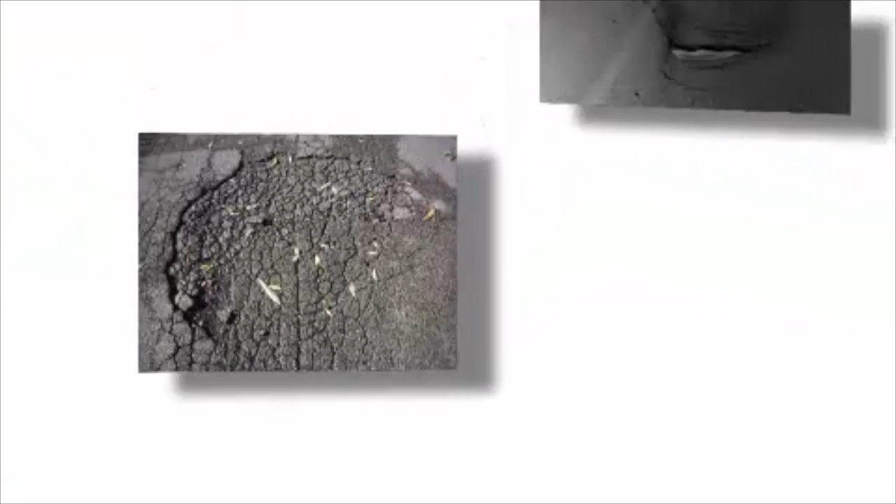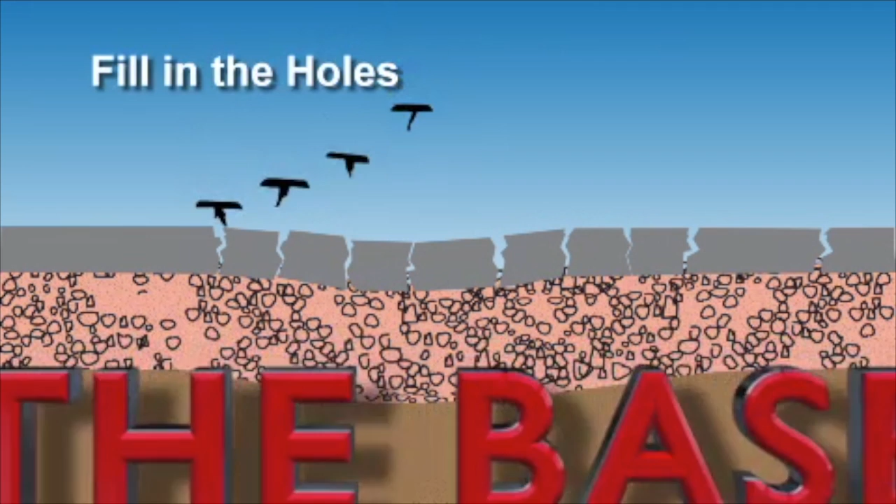When you take a closer look at the most common road problems, such as potholes, cracking, rutting, and shoving, it's generally not the asphalt itself that is to blame. It's the base. However, most common repair methods merely fill in the holes, seal the cracks, or cover it up with an additional layer of asphalt called an overlay.

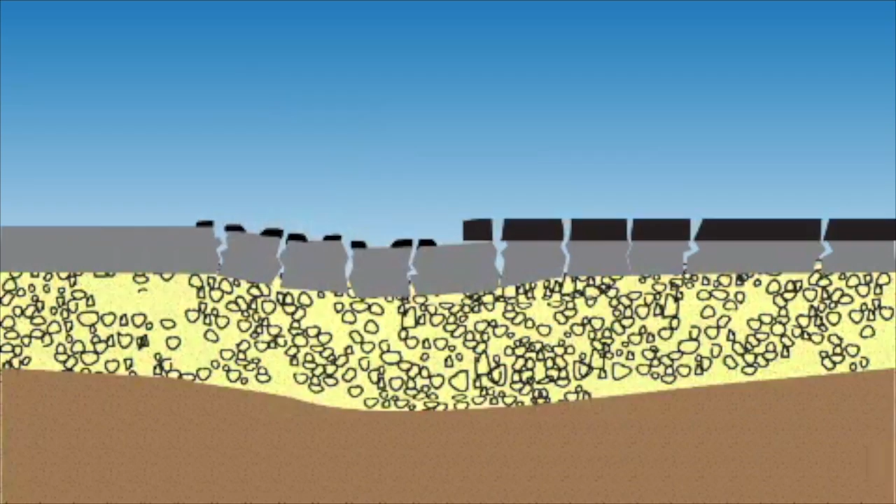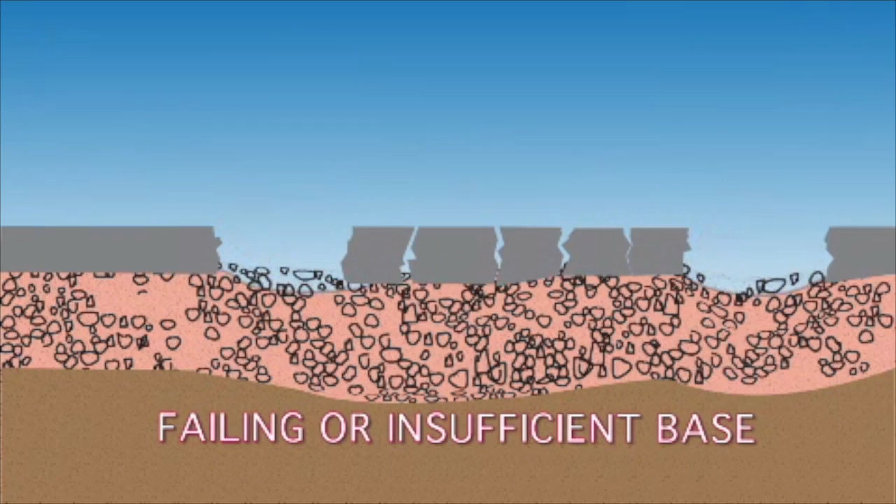Over time, this accumulation eventually needs to be milled down to make room for yet another overlay. All the while, the real problem of failing or insufficient base is never addressed. So it's just a matter of time, and the holes, cracks, rutting, and shoving reappear in a seemingly never-ending cycle.

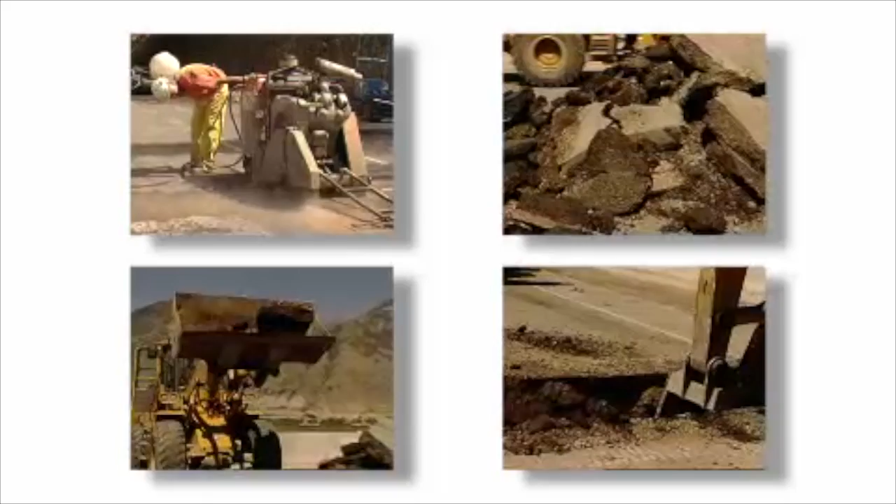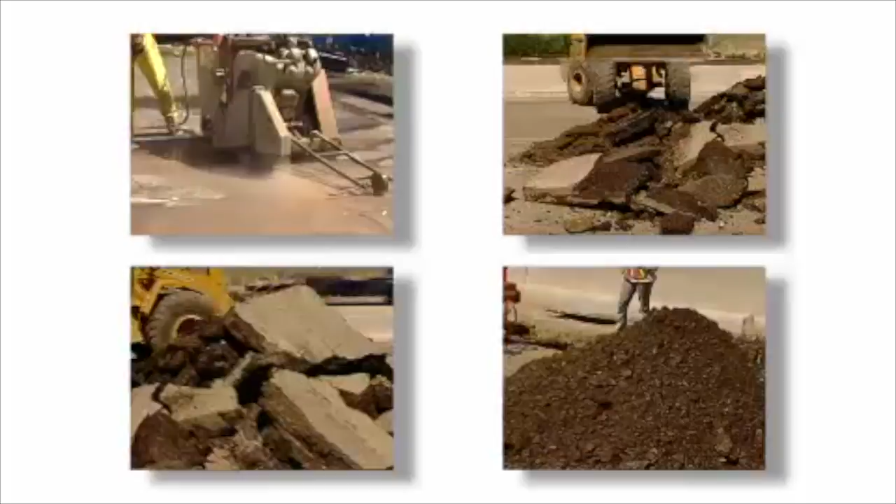Eventually, the road may need to be rehabilitated, requiring all of the asphalt and underlying material to be removed, hauled away, and new material to be hauled in, both of which are very costly and time-consuming.

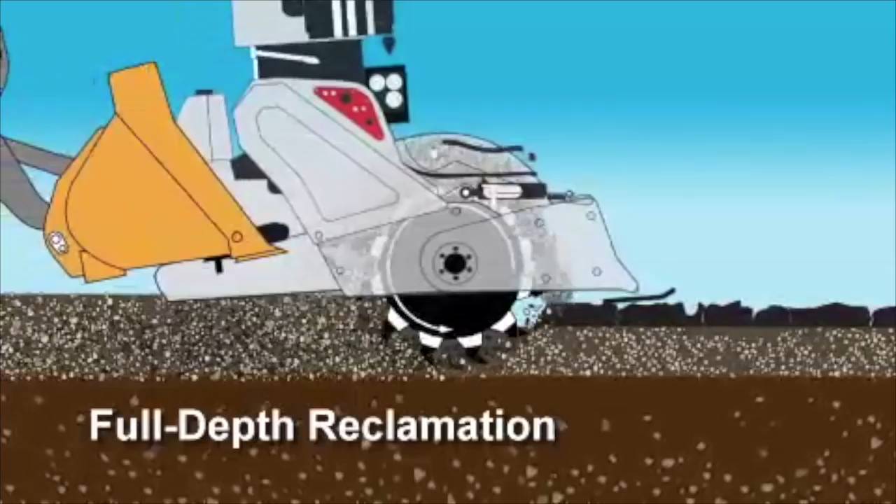Full-depth reclamation, which has been around since the 60s, is simply the process of pulverizing an asphalt surface, along with all of its holes, cracks, and ruts, into a reusable material that is uniformly blended and incorporated into the insufficient or failing base, adding both volume and structure.

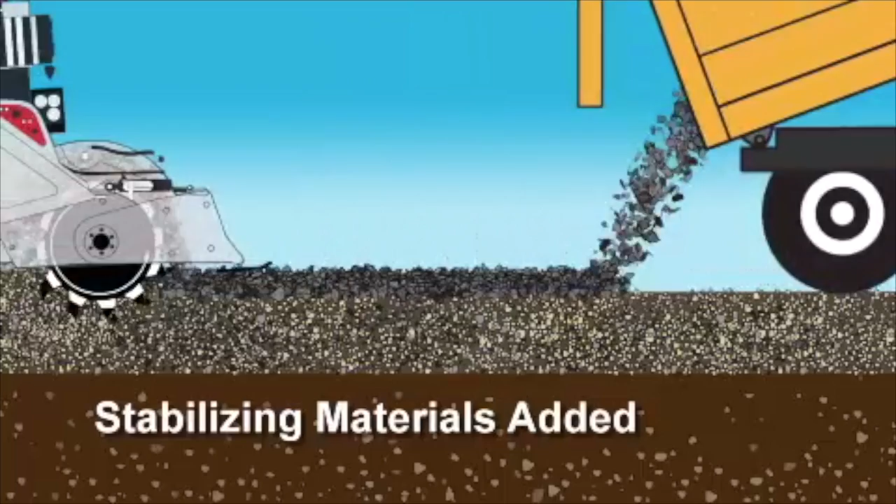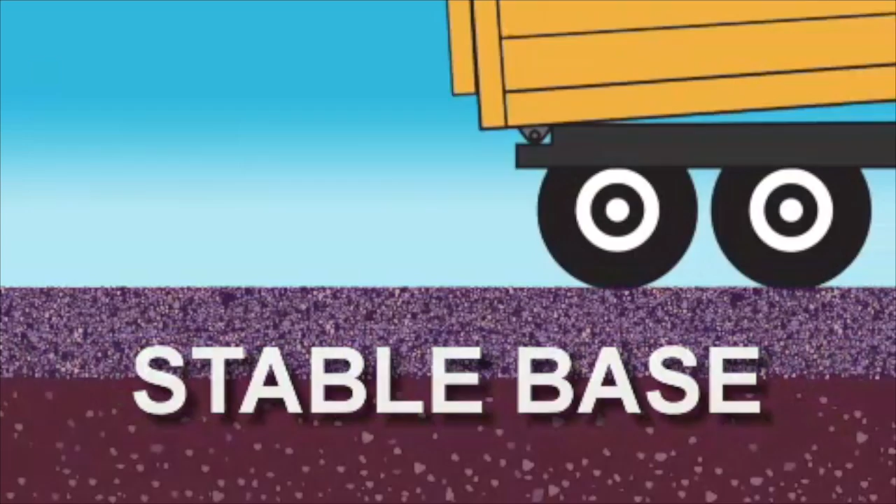If even greater stabilization is required, a variety of additives such as gravel, road base, cement, or other stabilizing materials can easily be incorporated. This homogeneous mixture can now be reshaped and, most importantly, recompacted, providing a more stable base. Finally, a new layer of chip seal or asphalt is applied, resulting in a more durable, longer-lasting, and smoother road for a small fraction of the cost of rehabilitation.

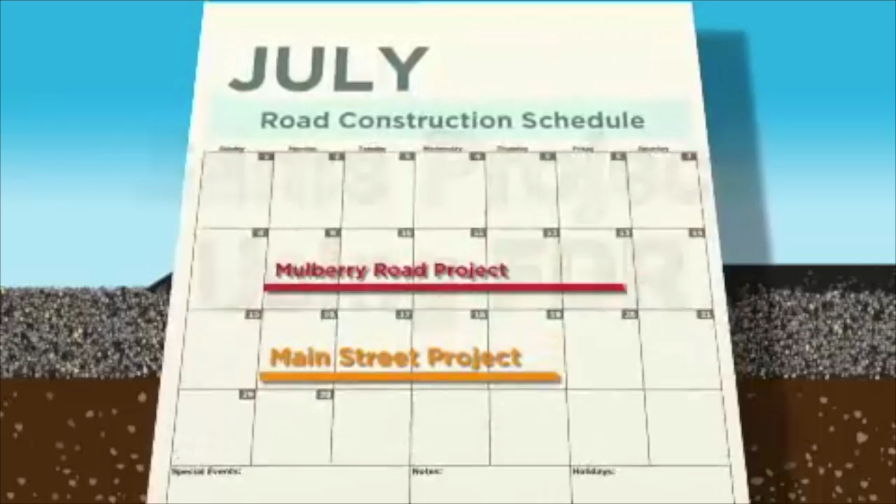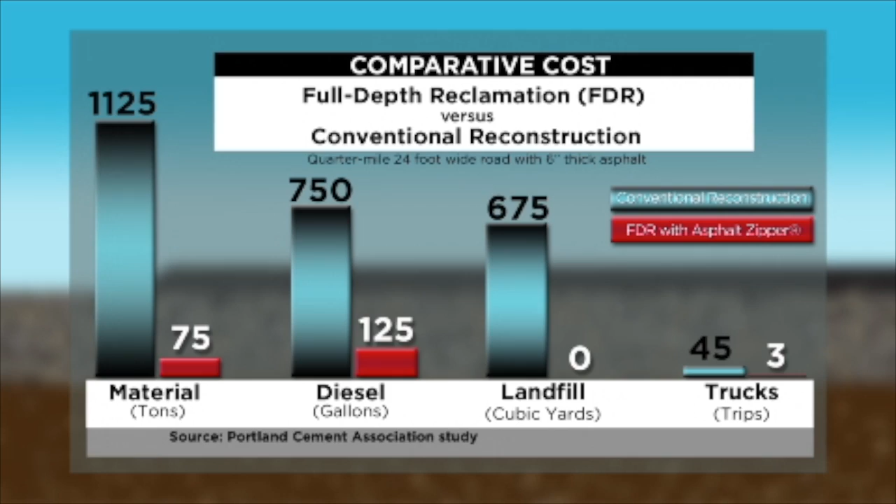Full-depth reclamation has been proven to be faster, less expensive, and longer-lasting. Rehabilitation projects that would normally take a week or more can be done in as little as 1 day. Cost savings average 70% or more because of the time saved, as well as from reusing existing materials in place. Best of all, now that you've solved the base problem, not just covered it up, the results will last years longer.

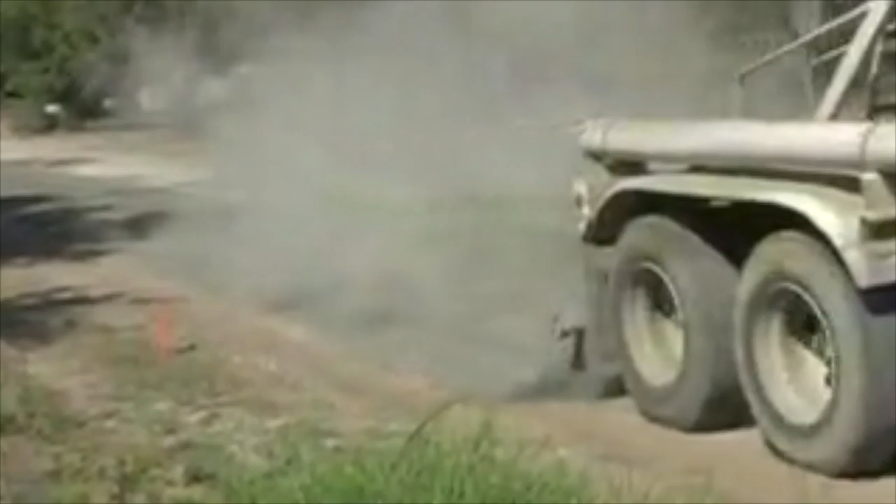Very simple, very easy. We're using cement, and the truck shows up and we spread the cement. We hook onto the zipper with the loader. And we begin our mixing process.

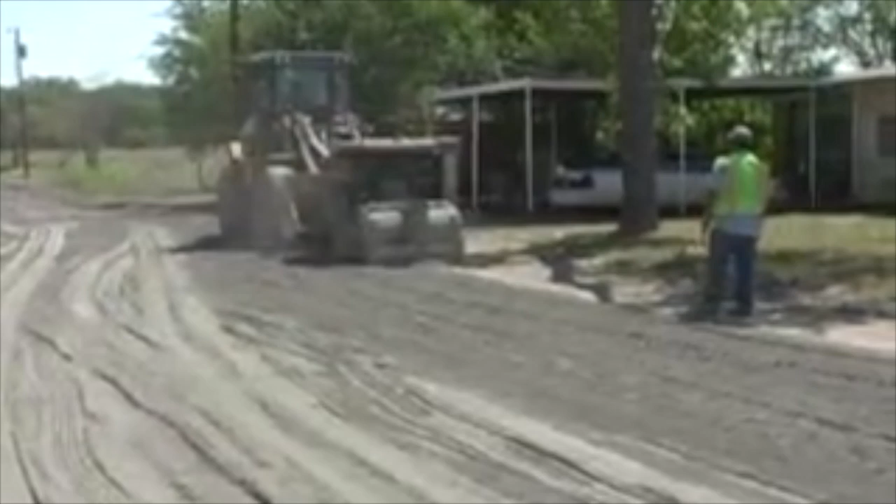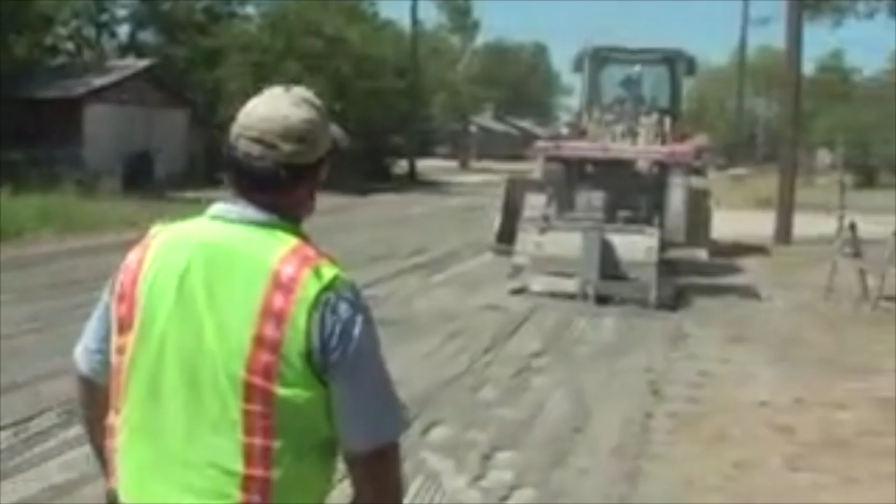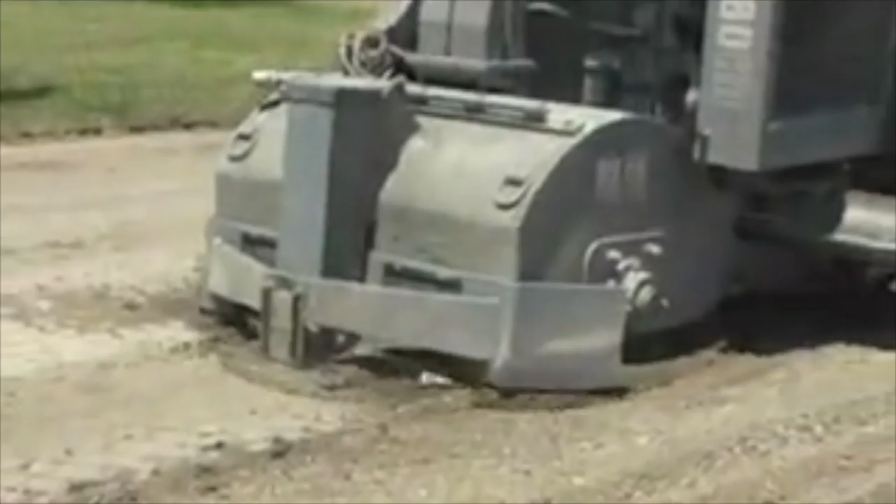The machine is extremely easy to use. We have one to spot and one to operate the loader. They love it. To do 700 foot, 30 foot wide takes about 2.5 hours. The material coming out after it's been mixed is the great plus to the machine, in that you have control of your aggregate size by the speed of the machine.